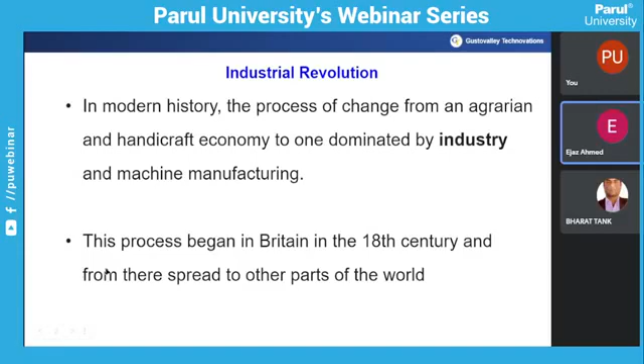So the industrial revolution started back in Britain in the 18th century. To be specific, the first revolution happened somewhere around the 1700s, and soon it started spreading across the globe. That's how the industrial revolution came into picture, speaking of revolutions 1, 2, 3, and 4.

Let's understand revolution 1 first. As mentioned, revolution 1 occurred around the 1700s, when man was introduced to machines. That's where we understood what machines were. In simple terms, they have been there to help us with manual efforts.

For instance, if I'm doing something completely with my hands or manual effort, that can be reduced to some extent with the help of a respective machine. So man-based work was, to some extent, eliminated by a mechanical machine, or it could also be a hydraulic machine.

As an example, we have a smith yielding his weapon into a specific shape. He does this with the help of a machine which is continuously hitting onto the object until he achieves the required shape.

But without the help of a machine, imagine how he would do that traditionally. He'd be hitting the same piece of metal using a hammer to get it into shape. That would be tiring and he'd need to spend more energy on that. So that amount of manual effort is reduced here in Industrial Revolution 1.

Along with machines, man also got introduced to factories. As we know, there was colonization, and because of that, there was also mobilization. People started moving from one place to another in search of better services and a better future. So they also needed employment or jobs, some type of work so they could earn and make their living.

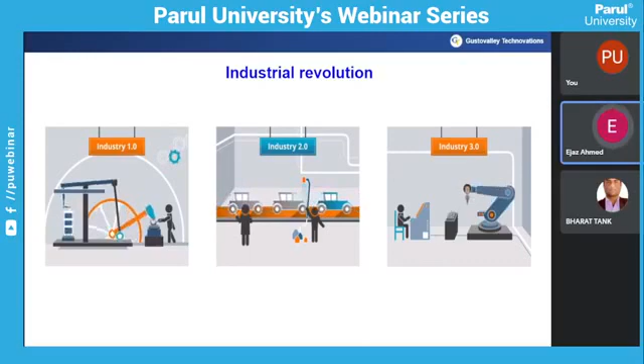And here we are at Revolution 4, which happened a few decades ago, where the major technology that the revolution revolves around can be understood as internet. Speaking about internet, I can say that it's an international network, or network of networks - you can call it anything. It probably is a sea or an ocean, right?

Where there are lots of people communicating with each other, connected with each other. There are different machines, equipments or devices which share data among themselves with the help of internet. So right now, during this webinar, you can see at the same instant different activities are happening all across the globe with the help of internet. That's how powerful this technology is, and all the other technologies basically revolve around this.

Speaking about internet, the major thing we need to discuss is information. Because until Revolution 2, or to be specific, if I want to store some data, if I'm working on a project and want to store something, will I be able to do that easily? No, I have to make use of papers, files, folders to do that.

But in Revolution 3, with the help of vacuum devices, which are further upgraded as storage devices, I was able to store my data maybe in a floppy, or maybe a CD drive, or maybe in a hard disk as such. And likewise, in Revolution 4, it was further simplified.

And the reason why I'm speaking about information here is, for instance, if you use a mobile device or maybe a computer, if you get connected over internet and visit a specific website, and all the way if you switch from that website to another, likewise if you keep switching and do some activity over internet...

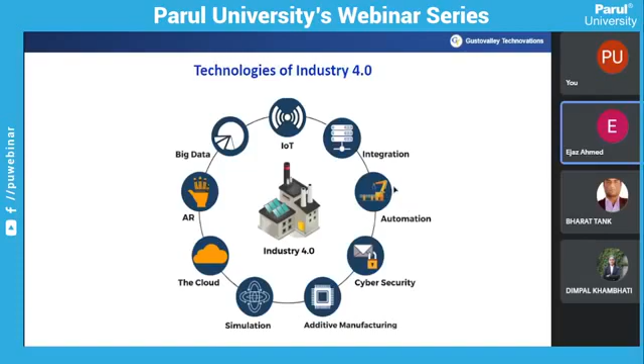Speaking about embedded systems, which I already mentioned was the very first step we took towards Revolution 3, when we knew that we could control a piece of hardware with the help of software. Also you can see like automation or the Internet of Things, or any technology, will probably have a base called embedded system within it. So it's the key for all the technologies we have right now.

And speaking about Internet of Things, as I've already given you an overview, let's have an example for understanding. For instance, I can provide you with an example of an e-commerce website, you can speak about Flipkart, Amazon, or maybe anything. Have you ever thought, when you just click on this, go to this website and buy a product, how does that get shipped to you, and what's the process which happens in the backend?

So let's understand that. For instance, when you visit this e-commerce website and you look out for a product specifically and you find it, you click on buy. So when you do that, it will prompt you for payment, and then it will ask you address details if not present. And then once the process is complete and the order is placed, what happens in the backend is the respective order which you have placed for the product.

The vendor will receive an alert from this e-commerce website saying that we need your product to be shipped to the nearby warehouse. So that way the vendor will be taking a new product from his shop or maybe from his storage, and he'll provide that to the nearby warehouse.

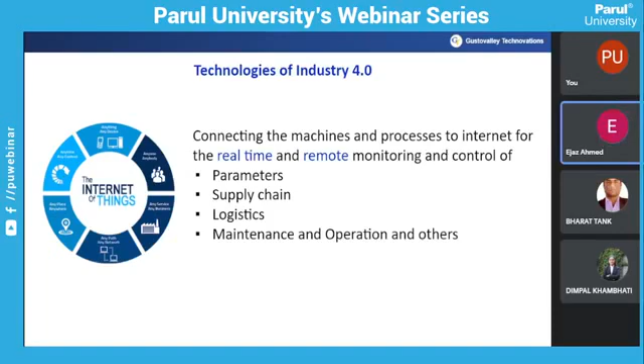Speaking about 3D printing technology, this technology is not actually new. It's an old technology invented back in the 1980s. Back then it was underestimated, with people saying that this technology cannot be used for better implementation in the real-time market, that it could only be used for prototypes.

So it was put down and there was no further research done on it. But a few decades ago, we realized that this technology has lots of opportunities which can help us in many ways, in different aspects and even different domains.

You can see right now the vehicles we use or the airplanes we travel with, the parts which go into them are manufactured with the help of 3D printing machines. Speaking about medicinal aspects, artificial tissues, 3D printed prosthetics, synthetic skins, and 3D printed organs are all possible with the help of 3D printing technology alone.

It has vast applications in different domains, maybe textiles or printing coral reefs, or it can be anything. The 3D printing technologies or machines have advanced so much that they are already being used in different countries for the purpose of construction or for laying down roads. You can just imagine how far this technology has come and how far it will go in the future.

And it probably has an upgrade version right now, which is 4D printing technology, an advanced version of 3D printing.

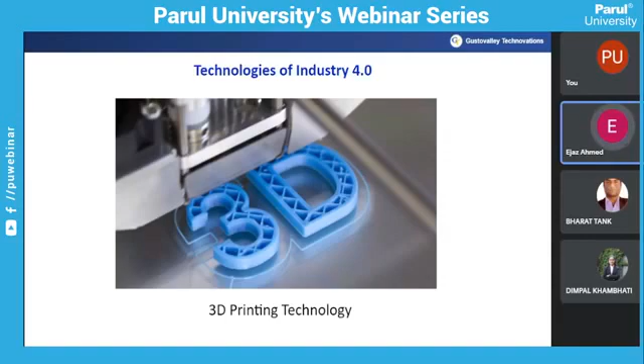Speaking about big data and cloud computing together, we can understand that this is where the machine learning process can happen. For instance, I have a system where I already gave an overview of machine learning. Let's understand that I have an embedded system where I've installed a sensor which detects some parameter from the environment, and that parameter is received by my input system and generally stored onto a cloud facility.

But instead of doing that alone, what if I write an algorithm for my system saying don't just read the data and store it, but compare the incoming data with the previously stored data so you can have an idea of what this data is and how it's going to be, and if I'm going to receive this much data over time, how my collection of data would look like.

With this machine learning algorithm, I can provide a way where the machine itself can understand what this data is, and if this data keeps repeatedly coming in, how my collective data will get affected. This helps my machine learning process provide better prediction as well as probability methods.

It can be for a weather forecasting system, or in real time, for different research industries, where they can understand and estimate how the market is going to grow in different aspects. That can be done with the help of machine learning platforms, which further paves the way for artificial intelligence.